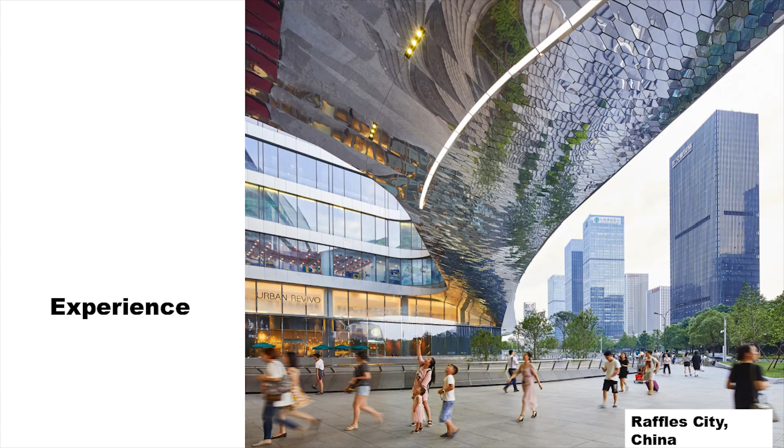So it's the environment that we connect to, how people experience it, how people live in that environment, and then technology connecting with that. But when we think about technology within UNStudio, we are not really interested in it primarily as a design tool, and we never have been. For us, it's not so much about parametric design. What it really is about is connecting to the building industry, what we can do now, how technology makes things possible. So when we are developing our knowledge, these are all different aspects that come into it that are about connecting different things together.

We do this internally by organizing our own conferences, by inviting experts into our studio, by inviting collaborations in different projects where we do different studies into different materials and all these things. These are the platforms of that knowledge organization.

About a year ago, we also collated those different experiences with knowledge in a book, and within that book we distinguish 11 knowledge tools, because this is a form of knowledge that's deeply personal. It's not about Googling a lot or finding knowledge from books that other people wrote. This is knowledge that we actually derive from our practice. Any one of us can be a knowledge worker, by really seeing our own experiences, living them consciously, archiving them, working with them, and seeing them as valuable - not just focusing on the end product, the building at the end, but the whole trajectory leading to that, where we develop all that knowledge. That is also deeply valuable to us.

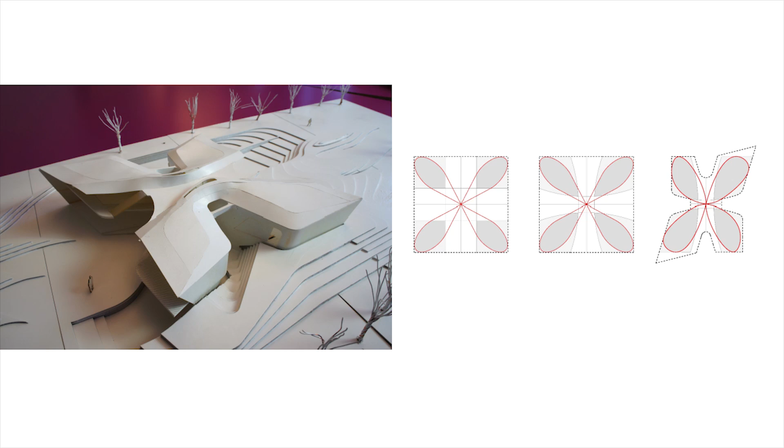This, for instance, is an example of such a big detail in a house in the Netherlands that was completed quite recently. You could say the entire organization of this house, which is like a flower or maybe like a Dutch windmill, is very much the detail that expresses the whole project, the whole building - maybe expresses also what this whole family is about, what their living pattern is about, and also what the environment is about, because it's set in a very extremely Dutch landscape.

And because of the organization, it really takes the landscape right within the heart of the project. So it comes here - you see these Dutch meadows with the cows peacefully grazing and the sea at the end of it. This landscape really goes right into the house, and you experience it from much closer than you would with a more frontal organization where the window leads to a flat view that you look out of. Here we are being embraced by the view.

Here we see how, of course, we always have to make it a little bit richer and more complicated with the different levels, so that the experience of sharing that view on the inside is really happening at all the different levels.

And so we have this relationship with the view outside, but that also has an effect on internal relationships and how people are aware of each other in the house, and how the staircase becomes this very light-filled spine in the house.

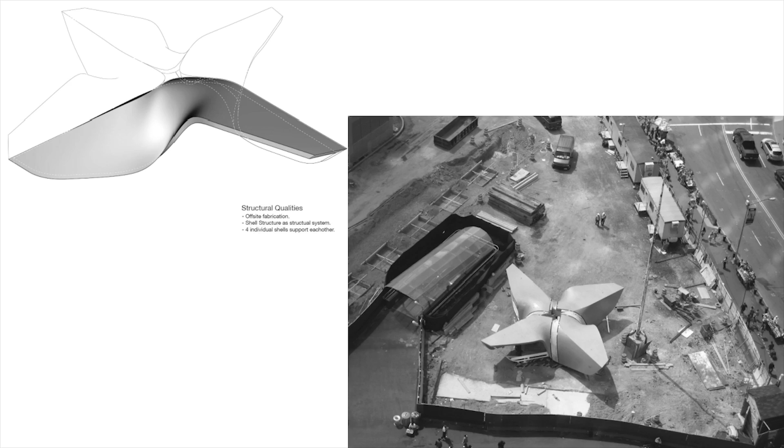Here it's very much about multi-directionality, a great belief of ours that we nowadays are really moving towards buildings and cities that don't have so much the front, the back and the sides as we did before, but we move and flow through the city in a much more inclusive way. We come from all sorts of directions and we love to embrace that multi-directionality in our work.

A little private house in New York, I'll go through it quickly, but again it's a small example on the domestic scale also of how that twist works, how it works in opening up a space, and I'll show it to you also in a little while in a bigger project with the diagonal views. So you can see people move through space in a very inviting way.

This project actually was, I think, maybe the second designed twist, but the first realized twist. It's a very compact twist in Austria, Graz, in a music theater, where this twist, again like in Arnhem, is a people mover, it is an announcer of a space, it's a celebration of the space and of how people have a nice evening out in this theater. But it's also simply the construction, it's also very, very functional.

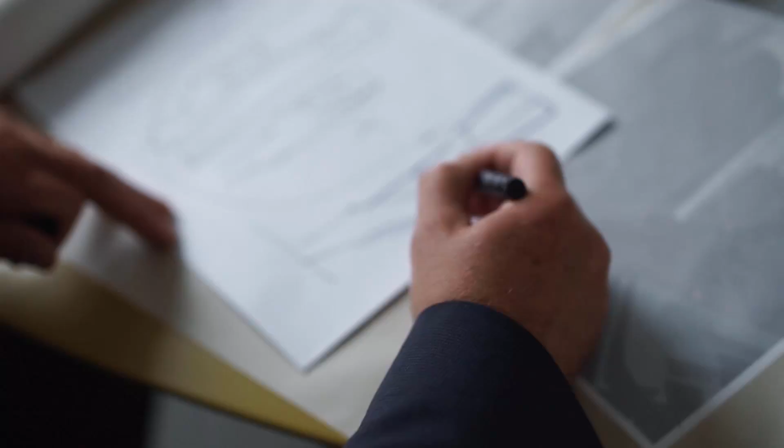The former Deutsche Bank area is situated in an unrivaled inner-city location. The new district being developed is turning into a vibrant hub in the heart of Frankfurt. UNStudio of Amsterdam has planned a unique ensemble that will confidently become part of the Frankfurt skyline and a new identity-establishing part of the city, which stands for diversity and quality of life. A healthy living space that promotes integration and sustainability.

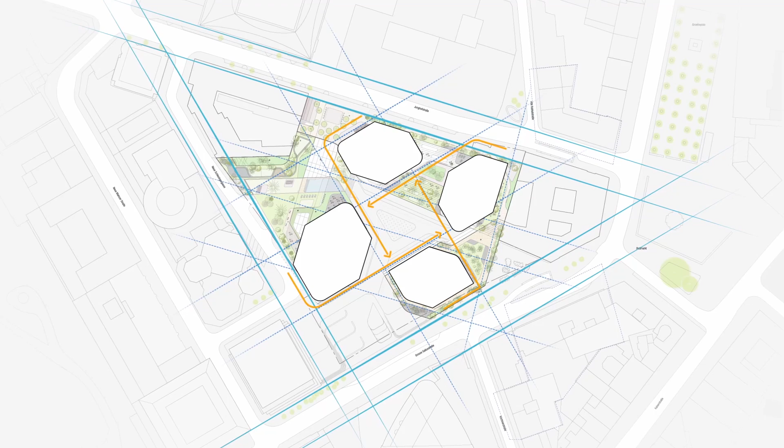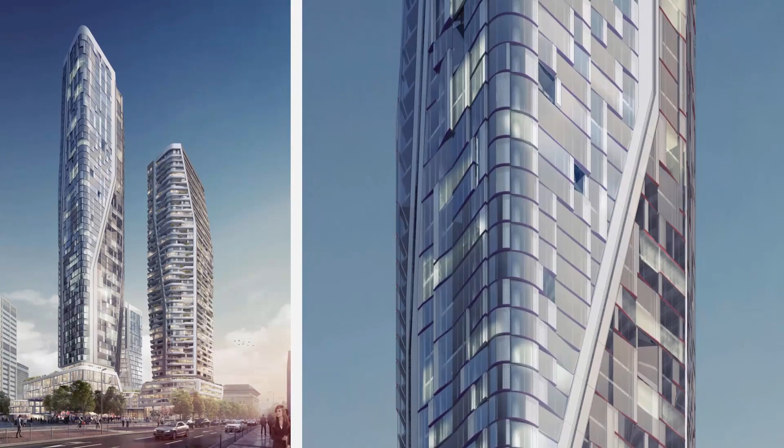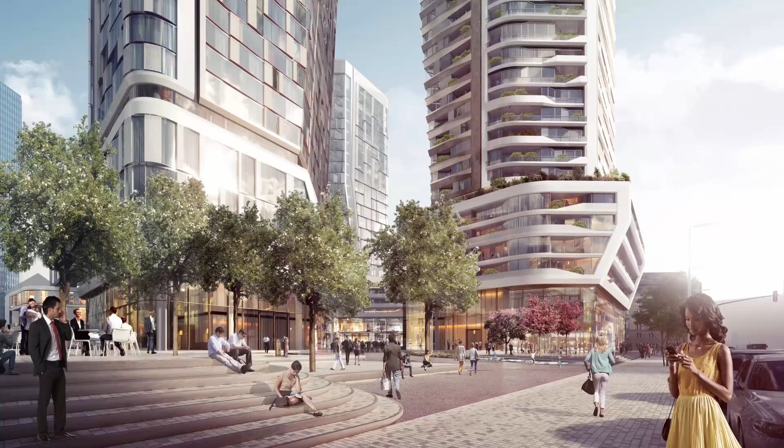The towers, which are rotated at 90 degrees to one another, create a principle of 360-degree views. The idea of a front and a back facade is avoided. To the south, the new quarter is connected to the Große Gallusstraße, which invites you to wander and linger. This is where people work, live and relax. The insular construction now opens on all four sides of the plot.

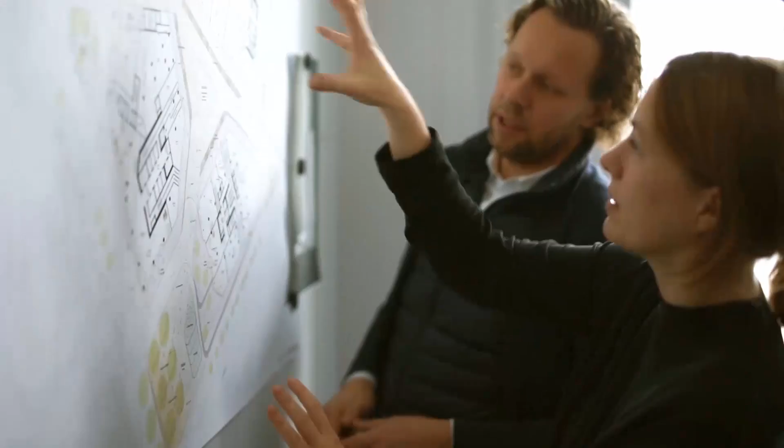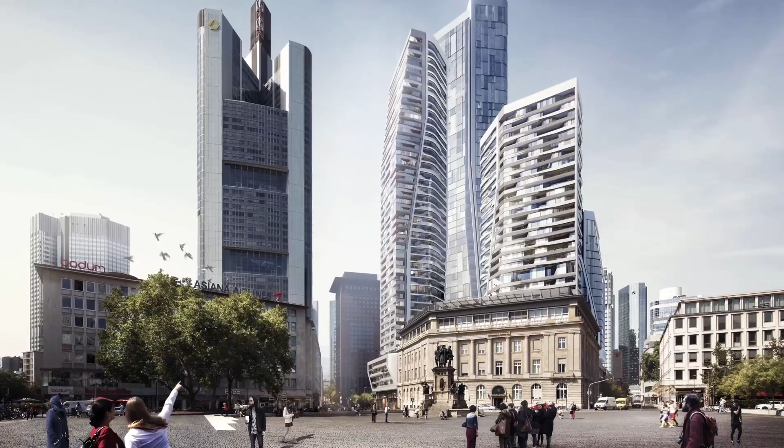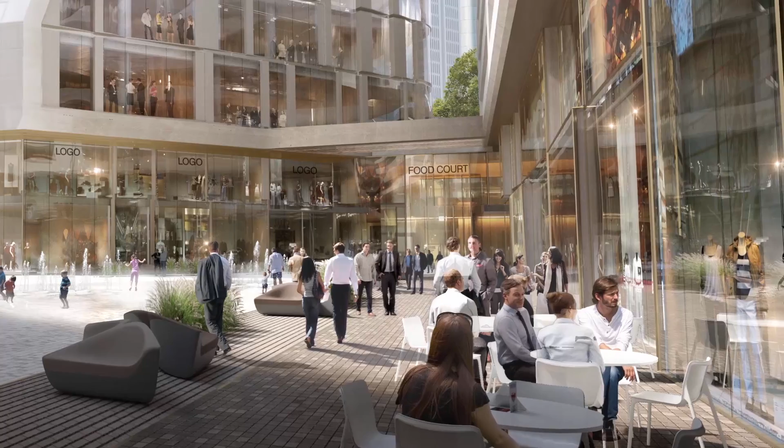The various entry points to the district are defined here. The district square will become the site's central anchor. Movement analyses have shown us how the building volume geometry and the routing work best. The mixed-use district will promote a healthy and sustainable inner-city living space. The food hall will serve as a key link between the district square and the Junghofstraße. The existing 50s facade along the Junghofstraße remains mostly untouched. Two structural incisions are connecting the district square and the T4 office tower.

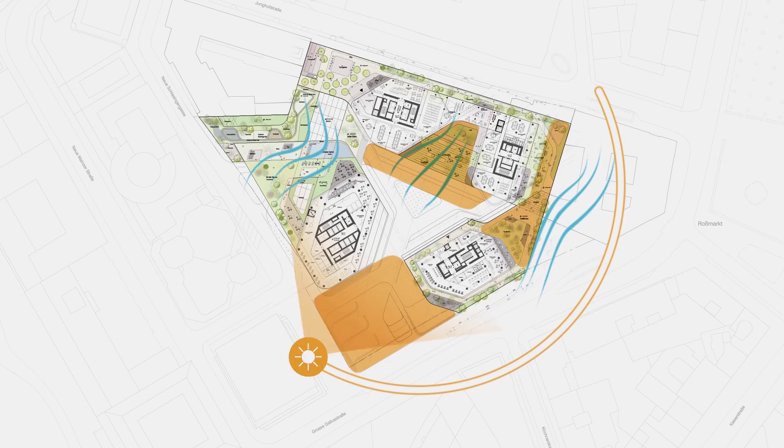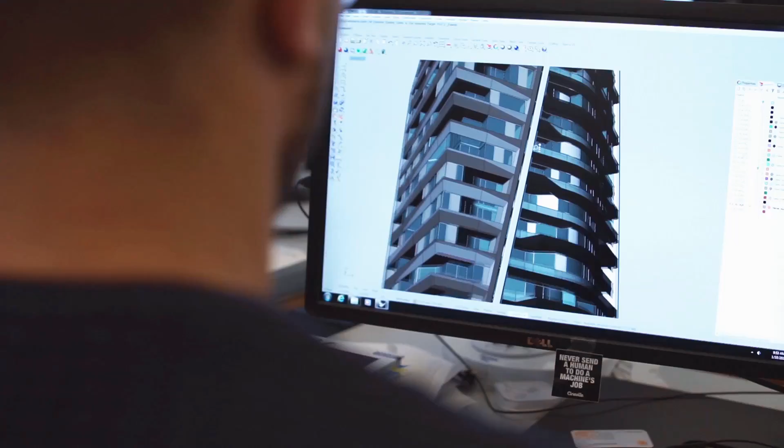A unique green roof garden on top of the base area serves as a publicly accessible natural haven in the heart of the city and high above the rooftops of Frankfurt. It's a project about people, the people of Frankfurt. It's about social sustainability in the city, active liveliness within the center. It's a project for all.

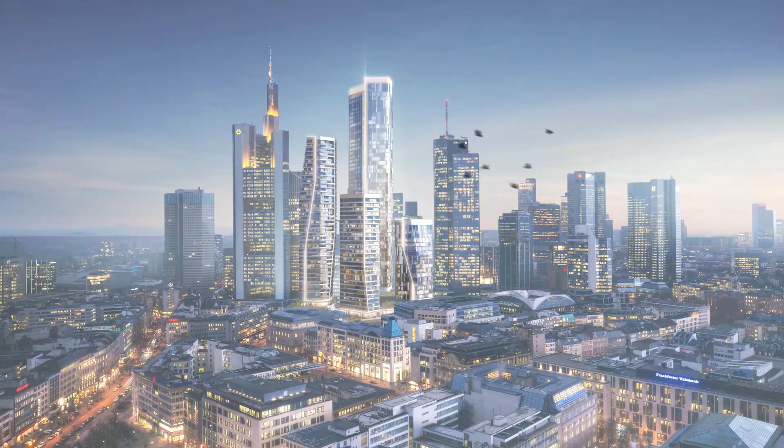Connectivity, again, it comes down to that. Connectivity of people, of technology and of the city, and we really are at a moment where we have all the opportunities to achieve that.

This will be, in fact, the tallest residential tower in Germany. Not because it's got a big mast on top of it, but it's really itself fully architectural, a big tower. What is also very interesting about it, and maybe also betrays our Dutchness, is that it's mixed use in terms of mixed population groups. So there are high-end residential apartments in it, but there is also social housing in it.

So the city also wants to literally be, as Ben said, a city for all. And we are also very much in favor of that and of letting people live closely together. So we have the public plinth with a rooftop on top of it. We have all sorts of things happening at different levels that let people also go up.